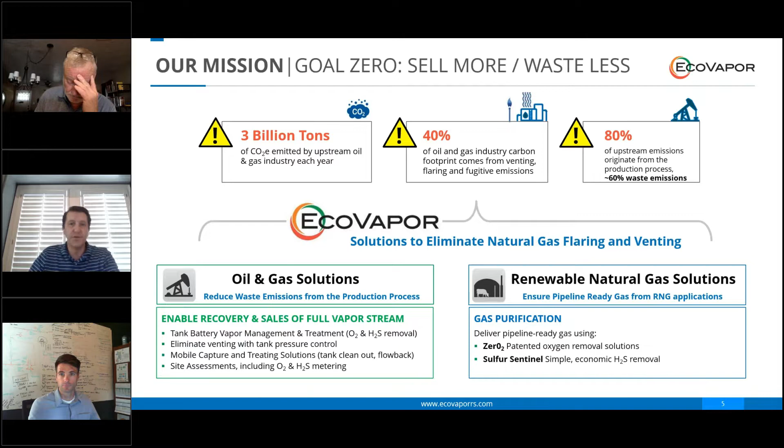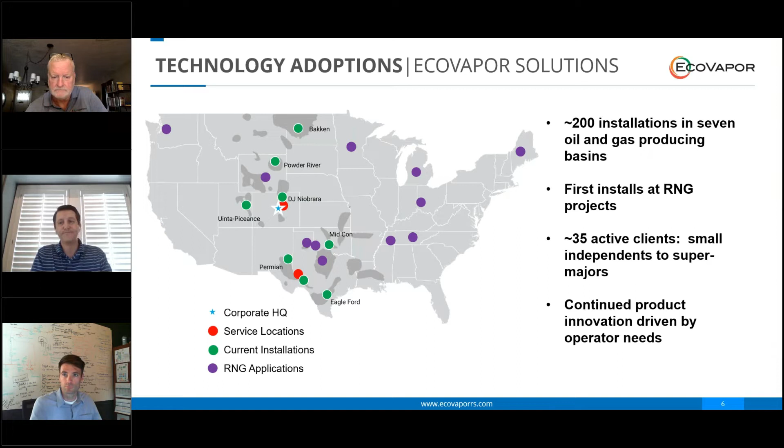So just real quick, for those that haven't heard about some of the products that are a little bit more established and widely deployed in the field today. Our environmental solutions start with the Zero2, kind of our flagship product that we're best known for. This is a system that helps to eliminate oxygen from natural gas streams. This helps us to enable full gas capture from a tank battery, including not requiring a VRT, flow through to the tanks, and enable that gas to be captured and of course purified before it hits the gas sales pipeline.

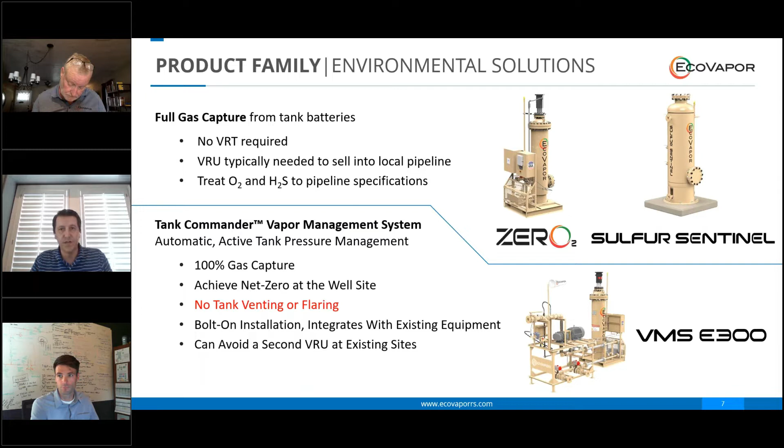But this is about 100% gas capture, really managing the elimination of the flare and the venting from your tank battery. It's a bolt-on installation, very easy to integrate into your operations. And of course, it can also help to eliminate a second VRU in an existing site. So we're excited to talk about that, but once again, we'll get into that in greater depth later on in the presentation.

So before we jump into the details on the VMS, and some of you may have picked up on some of this if you were at our last webinar, we wanted to touch on some of the sources and causes of these wasted gas streams and emissions that we see out there today. So starting with the EPA estimates, and especially the way we're using the emissions factors that are coming out of Subpart W. We hit on earlier the production process, of course, being the large contributor. But I think it's important that we also look within there where these emissions are actually coming from on a given production site.

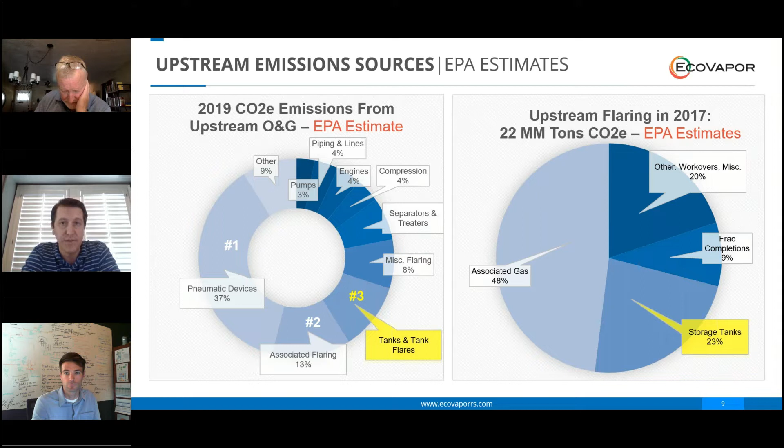But I think what's interesting now is we've seen a lot of unique, interesting, and valuable technologies coming up on the monitoring side, whether it be aerial, drone, ground-based, continuous, or your typical LDAR team with their OGI cameras. We're starting to move from modeled emissions to measured emissions. And it's always interesting to explore what some of those differences may be, which is why we're going to walk through a few case studies here with you real quick.

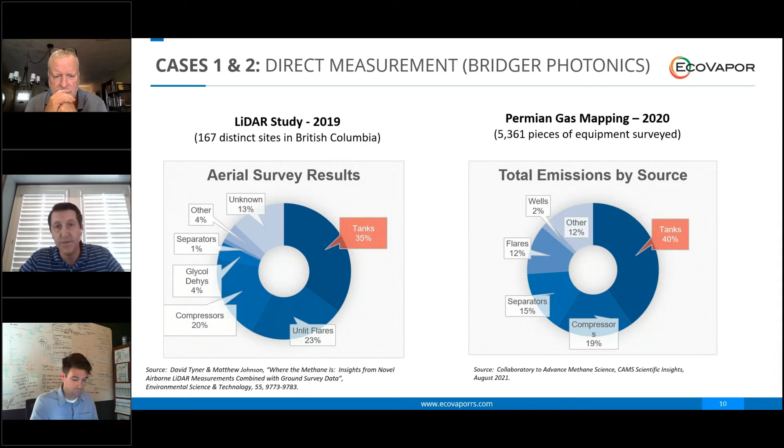In both of these instances, they clearly identify the tanks as the largest contributor to these emissions, and, the way we like to look at it as well, wasted product on a production site. You can see some other tidbits popping up here, like separators looking like another major contributor. But still, you look at flares, tanks, and separators, and that's the lion's share of the emissions. And this is, of course, quite a departure from what we've seen in the data coming out of the EPA emissions factors. And then moving on to another case study that many of you have probably read or are familiar with.

A Permian operator employed a handful of different monitoring techniques to look at their own assets so that they could actually take a step back and figure out how to make the most meaningful impact on their emissions footprint on their production sites. They used a fixed wing aircraft with Bridger. They used drones, which was Avitas, a Baker Hughes company. Then they also used truck mounted and ground continuous, including Scientific Aviation.

And I believe they went from 12% of their anticipated emissions on the tanks up to 68% of their emissions being from their tanks. So once again, a stark contrast from what they've observed in reality versus what they were predicting, what they were modeling.

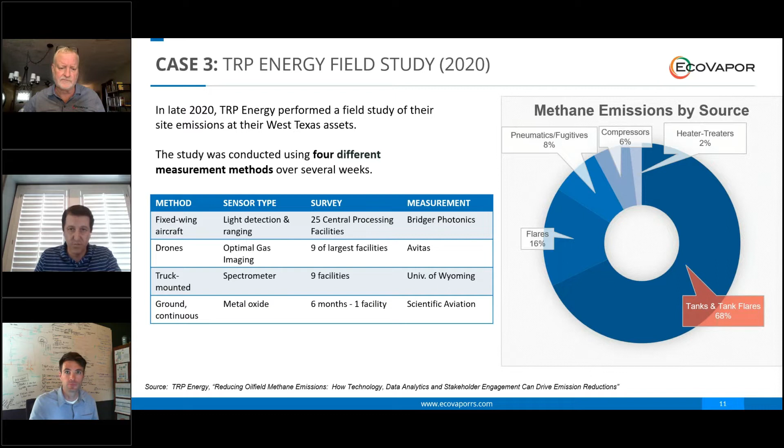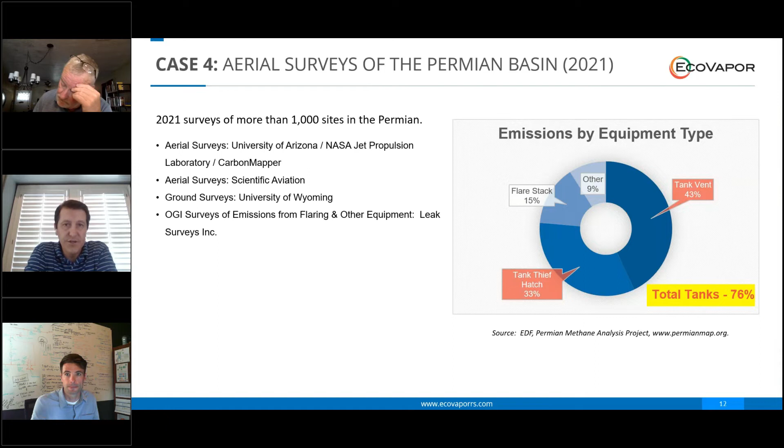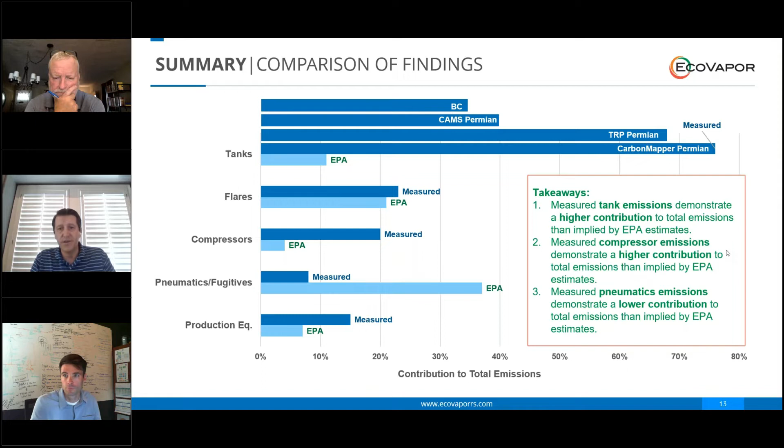But what this highlights is that we really need to focus on how we can mitigate these tank emissions, how we can mitigate the flares and compressors, and make sure that we're properly managing, capturing, and putting to beneficial use these gas streams. So key takeaways: tanks are a major source. When we start with the factors, they were already identified as one of the top three, but through direct measurement, they are the largest source of emissions.

The main punchline is that when we compare factors versus what is actually happening out there, we're going to learn, and we're going to continue to learn. The data is pretty clear and speaks for itself. But what we're excited about is that technologies are coming about that can actually help to mitigate this. And we know that no one wants to emit this product. It's a product that we want to put down the sales pipeline and ultimately profit from, and make sure that the hard work our industry does is put to beneficial use.

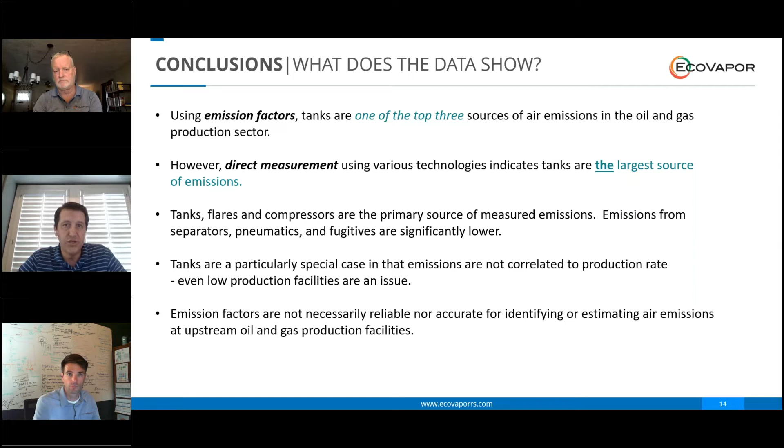And that's exactly what Ecovapor is about, and that's what we're here to do. To us, it's interesting as we look through this data and really start to apply the learning so that we can actively manage and mitigate some of the problems that we see in the field. With that, I'm going to hand over to my colleague Jeff, who's going to talk a little bit about what causes some of this venting and flaring before we get into the new product release, which Hans will talk us through.

Thanks, Jason. Obviously, if we don't understand some of the causes of the problem, then we can't address the issue. So let's talk about venting and flaring, which are really the source of emissions from tank batteries. When we talk about venting, if you're not familiar, atmospheric storage tanks operate basically within one atmosphere of pressure. They're not pressure vessels. There's an overpressure relief that typically relieves at 8 to 12 ounces of pressure, and a vacuum relief that typically opens at 2 to 3 ounces of vacuum.

And this is just to protect the structural integrity of the tank. So we're talking about less than 1 PSI of pressure is allowed in this tank. Well, the other thing is the tanks typically do not have controls of the pressure. They're just receiving fluids, voiding vapor. Truckers or pipes are taking the liquids out. And these tanks then are subject to really upstream and downstream factors.

The upstream factors that affect the pressure in the tanks are things like variable production of oil and water, production methods such as plunger lift, where there's slugs, if you will, of oil produced at one time, dump valves at separators, the trim on the valves, whether they're snap or throttle trim, creates a variability in production. API gravity of the crude, the size of the VRT, there's a whole host of issues. These tanks are sitting at the edge of the property and trying to, if you will, respond to all of these variable issues that are occurring upstream.

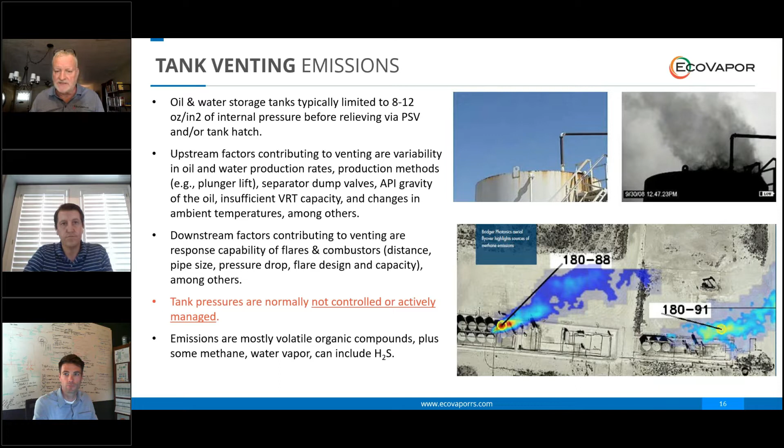Secondly, let's go to flares. So Jason gave some data, and I don't know if you picked up on that, but according to the EPA data, about 1/4 of the upstream industry's flaring comes from tank gas. Flaring of tank gas for years was the normal practice, since the gas was relatively low value. There really weren't regulations dealing with it, so it was quite common. And then particularly with the advent of Quad O, the idea was to begin to try to capture a portion of that gas to reduce the emissions from the tank battery.

And the common configuration that we see a lot is a vapor recovery tower with a small compressor skid. The vapor recovery tower was put in front of the tanks because it operates at a higher pressure and has less likelihood of oxygen contamination. And so that vapor recovery tower collects some of the gas. From, I don't know how many, Hans, 40 or 50 field installs, we've seen typically 40% more gas when we start working with the tank vapor. Put another way, the VRT is about 60–70% efficient in terms of capturing the vapor. We could go into the reasons for that; that's been covered in previous webinars. Be glad to talk to you, but there's a variety of reasons.

But basically, 1/3 to 40% of the vapor at the site is not captured by the VRT, and it goes to the tanks. And without any real ability to control quality, and with the frequency of oxygen contamination in very, very low pressure environments, the typical practice is to flare it. And that really has to do with quality. I mean, if there was an assurance that that gas could meet pipeline specs, particularly in oxygen, where pipeline specs are something like 10 parts per million, then you could sell all that gas.

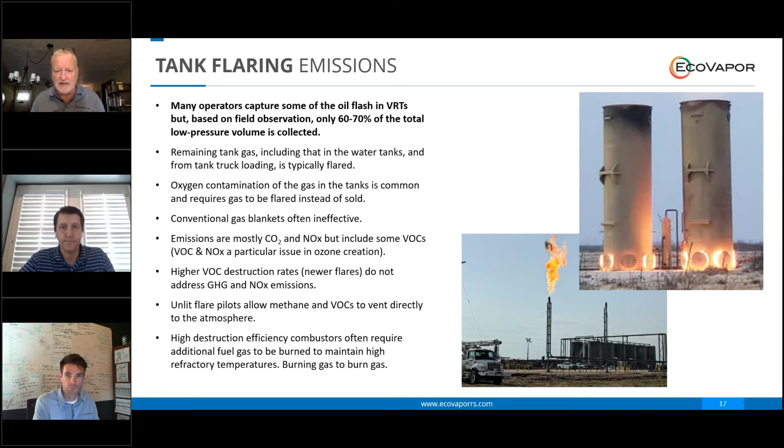Next slide, please. It's not a small issue. We don't have data on all the tanks in the United States, but when we look at the equipment that we have, each one of our E300 model, which is the most popular model, can treat roughly 250 million cubic feet a year of natural gas.

And the fleet we currently have installed, you remember that map at the beginning of the webinar, the installed base of our equipment has the capacity to provide enough heating to heat close to 1 million homes, or roughly 2/3 of the Denver metropolitan area. And its avoided CO2e by capturing that gas is roughly the equivalent of removing 800,000 vehicles from the highway annually. So this tank gas is a significant financial and energy resource that needs to be preserved.

And then also, quite obvious, if you capture it, put it in a pipeline, there are no emissions. So to us, it's the obvious choice, particularly in this environment. And some of this has changed. I know that flaring used to be quite normal, but we have a lot of changes going on. We have the ESG movement going on. We have an increasing focus on regulations. I was listening to information the other day on the issues regarding non-attainment, particularly in the Permian. And so things are changing, and there's going to be increasing focus on some of this. And I think we have a solution for you. Thank you. Hans, can you tell us about the VMS?

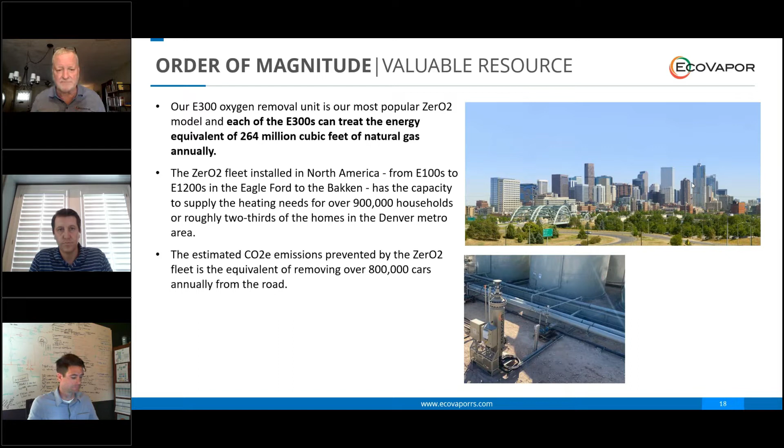Let's jump into looking at the solution that Jeff just teed up that addresses all causes of tank emissions, both uncontrolled as well as controlled. So we just discussed the ways that tanks contribute to upstream production facilities' emissions profile, including venting and flaring, and how tanks are the largest portion of the emissions footprint of upstream production facilities, and that 80% of upstream emissions originate from the production process. 60% of that 80% is waste. So tank batteries really do pose a real challenge, and perhaps a larger challenge, and if you ask me, an opportunity than was recently understood.

I think we can all agree that venting is probably not good for the environment. It directly contributes to ground level ozone. It's also an artifact of tank batteries being passive in their operation. As was just discussed, they're caught in the middle between separators and either flares or combustors, neither of which actively responds to tank pressure conditions. So the solution to venting probably should be active and dynamic management of tank pressure.

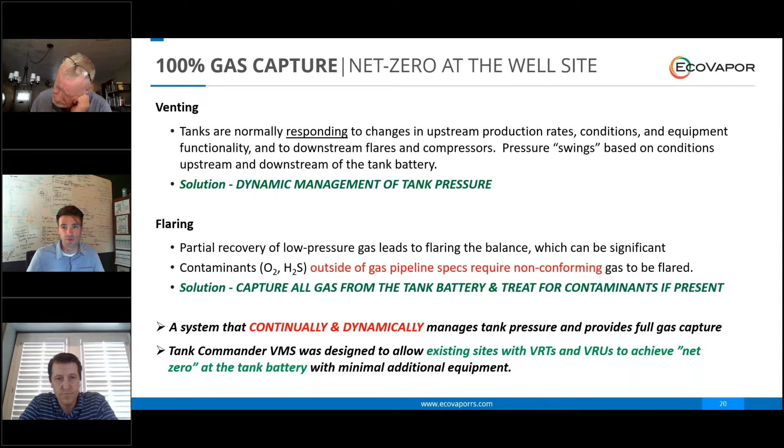And on the other side, flaring: combustors or flares have historically been relied on to control the balance of vapor that's not captured upstream of the tank battery. And those volumes can be significant and material. And it's also true that the contamination in that stream prevents its sale. It's not a new idea to hook a compressor up to a tank battery and push that rich, valuable vapor into the sales line, but it's also not a new thing that pipelines don't accept that, especially if it's contaminated with anything that's out of that gathering specification, including oxygen. So the solution there either is to prevent the introduction of contamination into that stream, which can be hard or worse, or to actively control it.

So what can we do? What can be done? Well, today, a single system can address all of these challenges and provide full capture for that tank battery, allowing operators to achieve net zero around those tanks, while minimizing installation requirements. So let's look a little bit closer into what that solution looks like.

Allow me to introduce the vapor management system. We call it the Tank Commander. It is a fully standalone product that completely manages, that is, harvests, purifies, and delivers for sale 100% of tank vapor on a location. The VMS product is unique in that it actively addresses two issues common to those tank batteries on upstream facilities in a single package.

The first is that, again, that passive nature of tank batteries, and it does this by actively managing that tank pressure, controlling it tightly to a desired set point by providing active control on both sides of that pressure window. So on the high side, we're eliminating venting. As well, on the low side, we're avoiding vacuum conditions or air inbreathing during oil loadout or when water is transferred, things like that. And the second part is where the VMS actively manages that gas quality and the issues that can be associated with that that would otherwise prevent midstream gas gathering lines from accepting that vapor if it is contaminated.

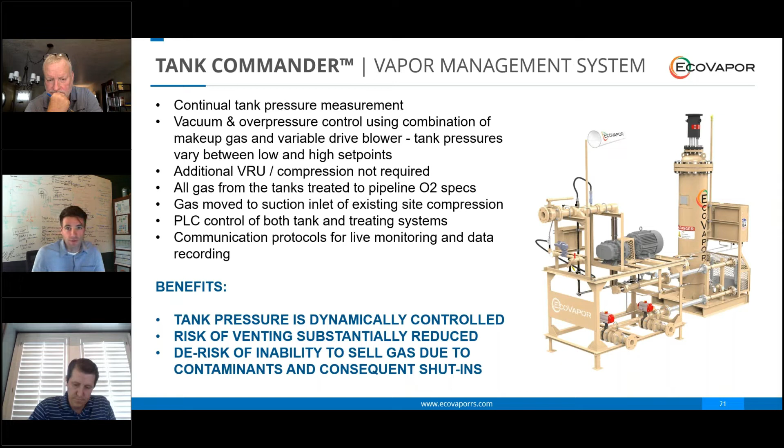So the VMS, let's just look at the specs on it and where it came from. The VMS builds on Ecovapor's 12 years of experience in both harvesting and purifying tank vapor. Again, from the standpoints of both LOE and minimal maintenance requirements, we think that the VMS can be viewed as a Goldilocks solution. It does what is needed to address these challenges, all of them, both pressure and contamination, while minimizing what I would call the pain in the butt factor. It's really easy to install and operate.

And the blower on this package is specialized for this application. It allows 50% higher discharge pressure than most other competitive blowers would. But at the same time, going back to that Goldilocks side, it's not a compressor. There's no valves, there's no packing, there's no active lubrication system. It's simple in its nature, which means it's inherently reliable and inherently easy to maintain.

Also, fair to say that a single controller ensures the compatibility of the rotating equipment that collects that vapor, as well as the gas processing equipment that purifies it. Instead of fighting each other or lagging to respond to one another, as we can see with multiple third-party systems on a well site, that's not the case. If anything, these two subsystems enhance each other's operation. And one of those subsystems being the O2, we slightly modified a typical E300 to optimize its operation in low pressure environments.

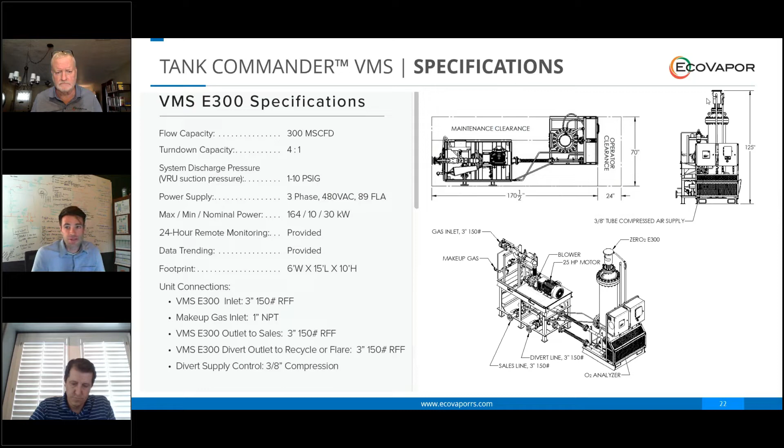So at this point, let's see the VMS in action as demonstrated by Ecovapor's own DJ Operations Superintendent, Charles Bidgood.

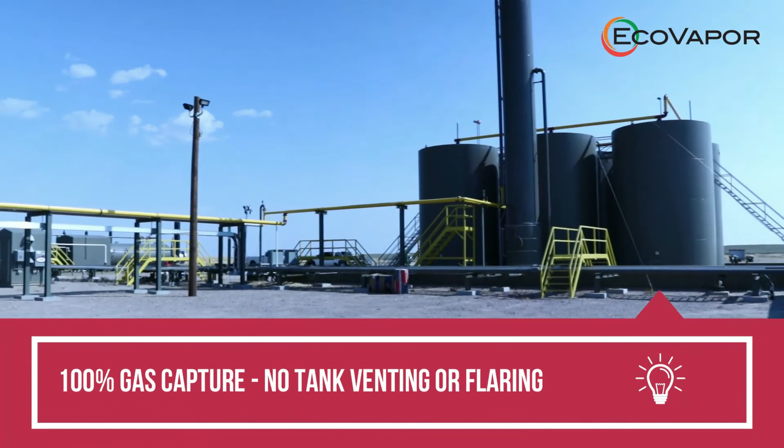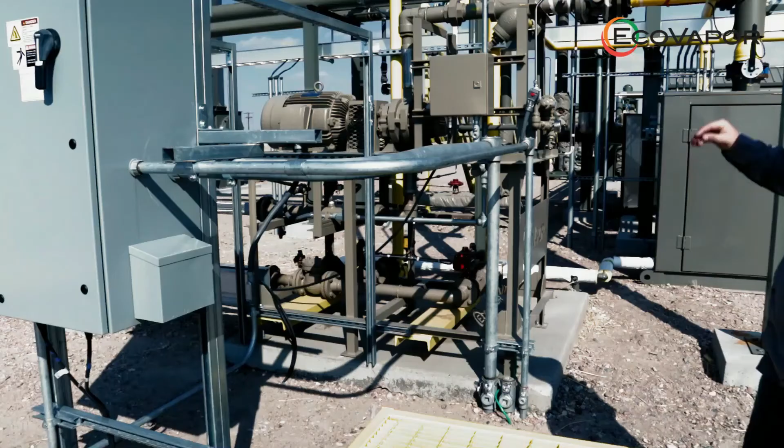We process the tank vapors, so we pull it off the tanks, and it comes down this yellow pipe behind me here, and it's going to come into the system, and this will come into our blower system. It's a 25 horsepower blower system. Essentially, we will process that gas and shoot it down the inlet.

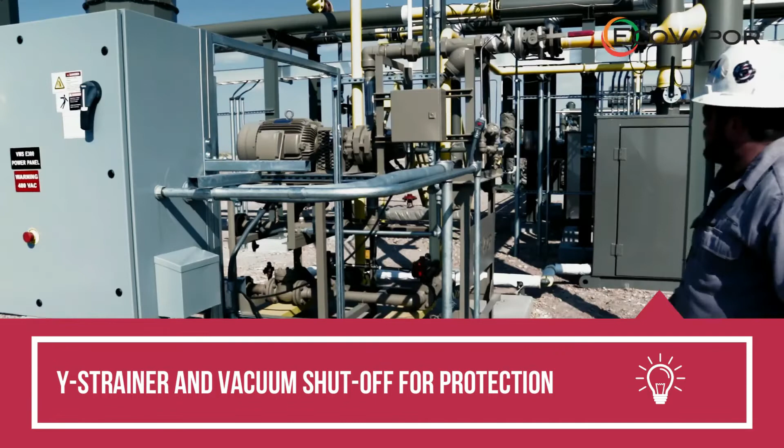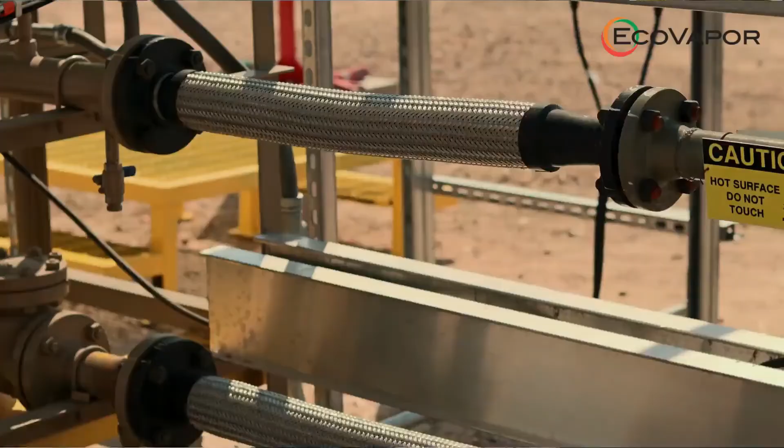We have some protective applications on the blower system, which include our Y strainer here. We have also a vacuum shutoff on the system, and then moving along here, we will send the gas down our inlet here, and it will go through our Ecovapor system.

This is our E300. It will process the gas and create a catalytic reaction with the oxygen, stripping the oxygen away and passing out through our discharge. And on the other side of the system here, we have a watchdog that will monitor the oxygen, and if we have good gas, it'll go back down the discharge here, and it'll come into this bottom area where we have our sales and divert.

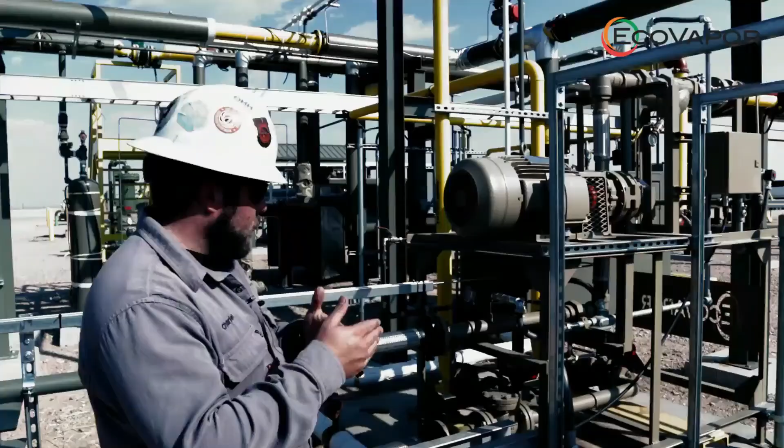If we see good gas, we will open up our sales valve and shoot the gas down to a booster VRU, which will go down the pipeline. If we see bad gas, we will have a quick action divert, which will send the gas up this yellow pipe here and down into the combustors. No gas is venting from the tanks.

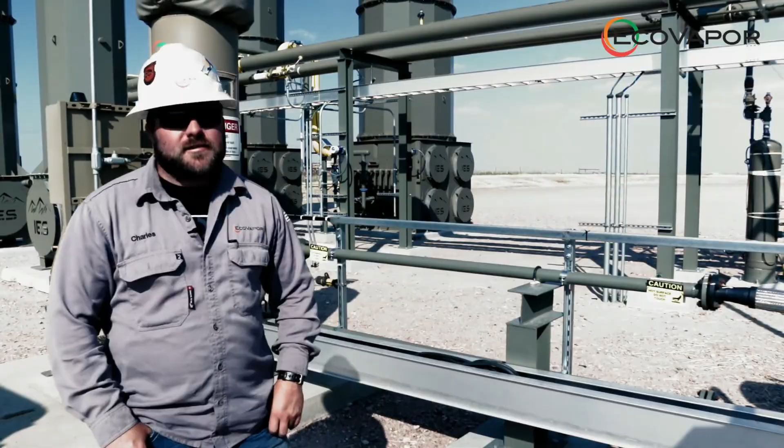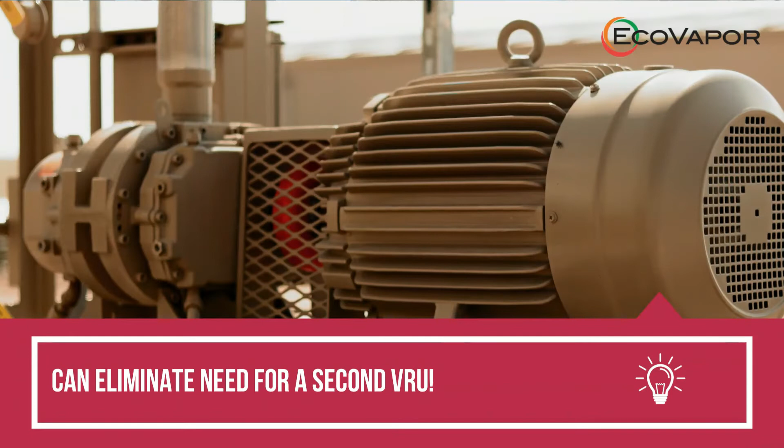We are pulling everything from the tanks, and we are controlling that through our blower system with our 4 different speeds, depending on how many ounces are in the tanks at one time. So essentially behind me here, we have our combustors. They are currently off because we are selling the gas.

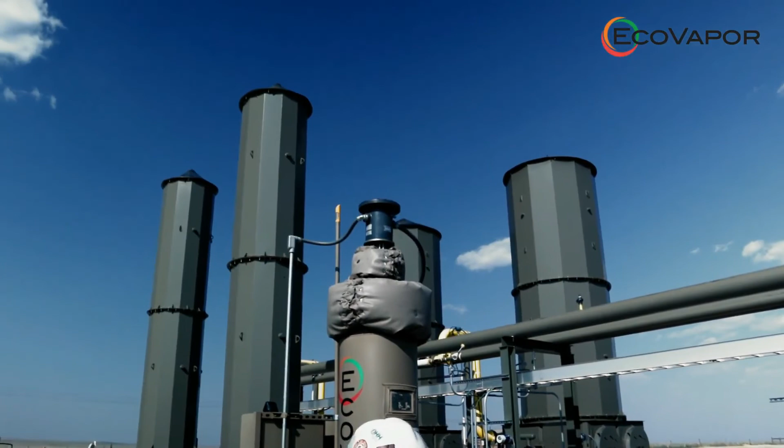So through our VFD controller, we are automatically controlling the tank pressure in the tanks, and that is allowing us to not vent anything from the tanks, and we are selling all of the gas down the sales line if the oxygen is good.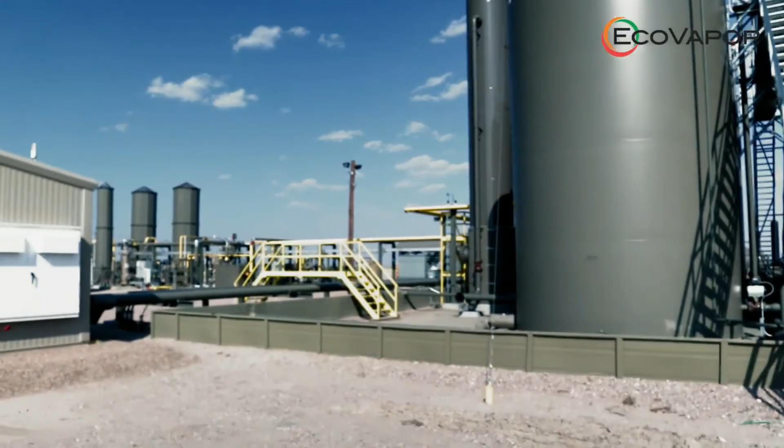And as we'll look a little bit closer into in a minute, when we look at the actual data, just want to address that question that Charles posed of, is the gas good? That simply comes down to only one question, and that is whether or not power is available. Looking forward to showing more about that in the next couple of slides.

But reviewing the performance of VMS that's been installed since August. To date, its performance has proven a few things. One, obviously, I think a good thing to lead off with is boosted production revenue. We're making more revenue because we're selling the richest gas on location instead of flaring it.

So that makes sense. And at just 1/3 of its operational capacity, it's providing over $350,000 of realized revenue on an annual basis, which means that it has the potential to provide over $1 million of annual revenue if it's used at full capacity. Also on the emissions side, significant emissions reductions, really for the same reason as that boosted revenue stream. We're selling the gas, we're not flaring it.

It makes sense. Yeah, and what we're seeing there is over 80 tons per year of avoided regulated pollutants like VOCs and NOx. And when we go to the unregulated pollutant side, we're preventing almost 5,000 metric tons of CO2 equivalent just by bolting on this equipment.

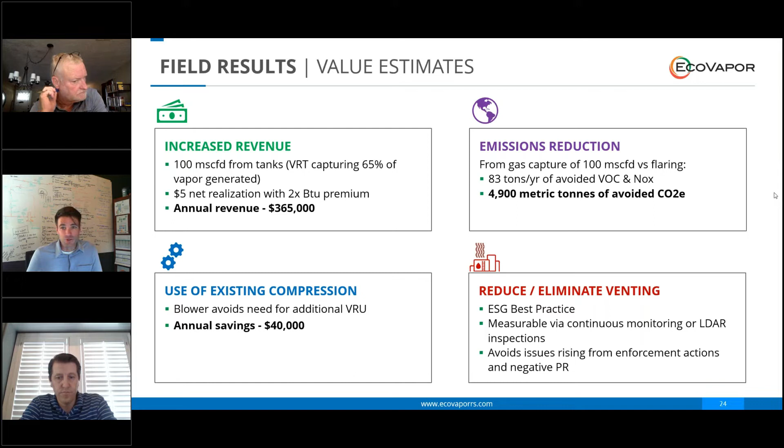In this instance, the data that we're about to go through, this VMS system is deployed on a large independent operator site in the northeast corner of the DJ Basin, currently capturing 75 to 100 MCF directly from the tank battery. We anticipate that volume is going to grow as the rest of the site is brought online.

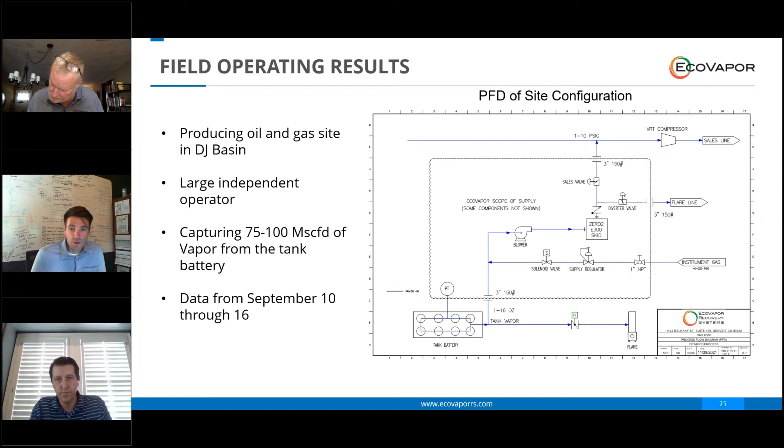It's seamless and operates in concert with one another. So again, this particular site started up in August, but we're going to zoom in on just 1 week of that runtime data to gain some insights. So this is the first of 2 slides where we're going to be looking at trends. There's going to be 3 trends on each slide.

In this instance, we're looking at how tank pressure is actively controlled. That's the top line up there. Again, it's probably redundant at this point, but worth reiterating. No venting. We are actively controlling that pressure within a tight window, and it catches it if it goes on either side. The next one, the middle trend line, is representing the blower speed, and the point there is that the blower adjusts its speed, its rate of vapor capture, based on those continually changing site conditions. It knows how to adapt and respond no matter which direction things are heading.

And then the last one, the trend line on the bottom, represents that the discharge pressure is stable. Easy for Ecovapor's operators, the site operators, to look at that data and see if something's changed, but also important to say that there's plenty of room to go. The maximum discharge pressure on this particular blower is 15 PSI, and we're keeping it right around 5. So plenty of room to run there.

Again, this is actual operating data from the field. We would go into more months' worth of data, but it just compresses the data too much, and we wanted to showcase the resolution here. We're pulling each of these data points and putting it into Ecovapor servers with a 2-minute resolution. There are several ways for operators to obtain this data.

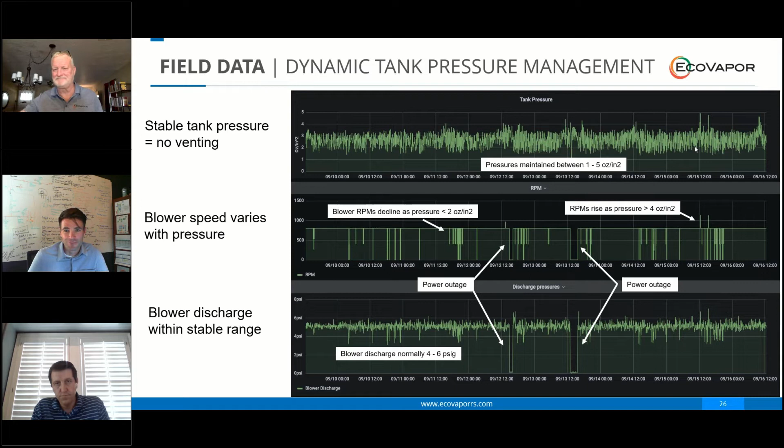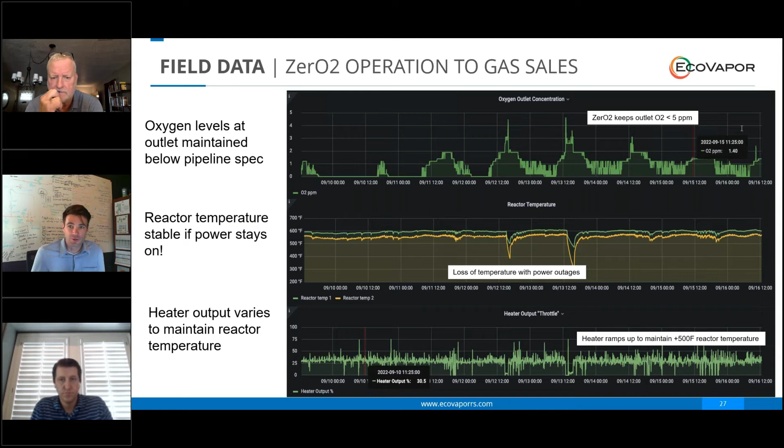And okay, we're talking about O2 concentrations, but if needed, the VMS can also be configured for sour applications as well. So I hope that answers the questions of how it performs in the field. I'll pass it back over to Jason.

All right, thank you, Hans. Appreciate that. So as you can all hear, we're pretty excited about this product and about the applications it brings. We really do believe that this is an excellent bolt-on product that can really address some of that gas that can be left behind, some of that flash that can be left behind by your existing VRT and VRUs, or even a stabilizer that might be out there.

So we love active pressure management. Venting and flaring are, of course, huge sources of emissions and huge sources of wasted product. And so, as you just saw with some of the monitoring we are doing as well, we can actively demonstrate that we are maintaining within the right pressure window to ensure that we are minimizing the likelihood of those venting operations. So overall, we think that this is a great way to profitably enable you to reduce your emissions while selling more gas, and we think it's easy to install and deploy in your operations.

And one thing that we do at Ecovapor is we typically don't want to release a product until we've seen some field data, until we've seen results in the field that we know that we can stand behind. And as we've kind of shown here, we're proud that we do have this in the field. It is operating, and the customer is pleased with the results, and we're also pleased to report that number 2 is already installed and will be commissioned and turned on tomorrow.

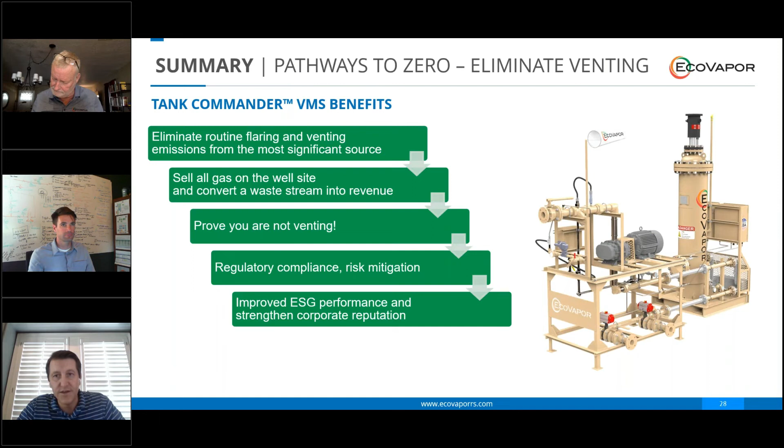One of these, Hans: what would cause the gas quality to be off spec? The video talks about diverting the gas. What are the causes of that? Great question, Jeff. I guess the usual suspects are H2S and oxygen. H2S is something that oil fields are used to dealing with. Typically, it's found in reservoirs, but we also have seen a number of instances where operators have been caught off guard where they have a sweet formation, but somehow they're getting sour gas on the sales side.

That's typically because the origin of that H2S is biologic in nature. It can be bugs that are living in the bottom of the separator. Water tanks are also a usual suspect there. So if your gas gathering doesn't allow for sour takeaway, typically those cutoffs can be around 4 parts per million. This webinar is not about Ecovapor's Sulfur Sentinel product line, but that's how we address those issues.

The other, and this is certainly more prevalent, is contamination by oxygen. There's a number of ways that O2 can get into the tanks. I think we know about most of them, but probably not all of them. There's what you might expect when water transfer pumps come on, when hatches are open for gauging, during crude sales events, when oil is pulled from the tanks, that volume can be made up through inbreathing. I could honestly talk about this for a long time, but I'll try to hit the highlight.